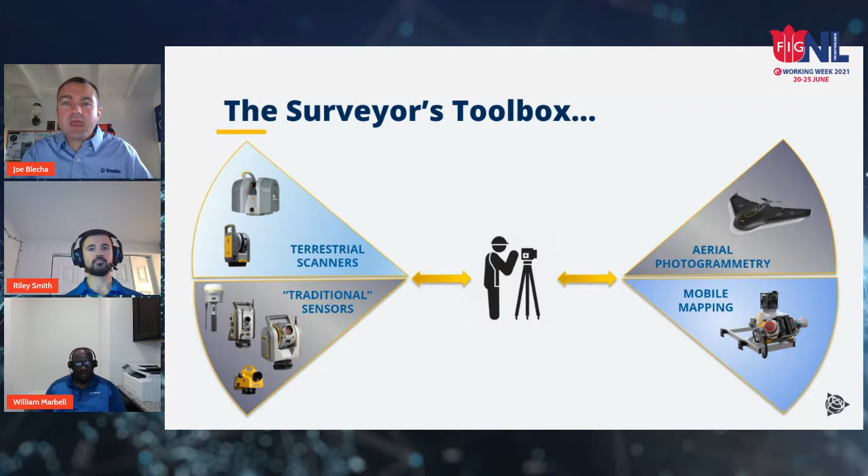But that's just the start, right? Additional sensors that are becoming increasingly common are aerial photogrammetry, either fixed wings or rotors, manned or unmanned solutions, as well as mobile mapping systems. I've got the MX9 shown there from Trimble. But then we go on, right? There's been an ever-increasing push to get the surveyor involved in the BIM conversation, right? With the 3D BIM or geospatial BIM kind of conversation, where things like metadata and attributions and a third dimension are becoming ever more important in the surveyor's world.

And speaking of attributions and features, the GIS world as well, right? Things and connections with industry leaders and partners there are, again, becoming ever increasing with the surveyor here, the data that the surveyor is collecting at the center of it.

And then we would be remiss if we didn't mention cloud services. So both cloud-based processing or data transfer or applications, things that help you, not just cloud for cloud's sake, but productivity enabling tools that are hosted or available via the web.

And then from the surveyor, from taking all of this data, moving out to a CAD environment where they can take this data, process the data, post-process the data, and then deliver whatever type of final result that is needed for the project or for the client. So this world is increasingly large and expanding. I've probably missed some things here, but the surveyor is at the center of it.

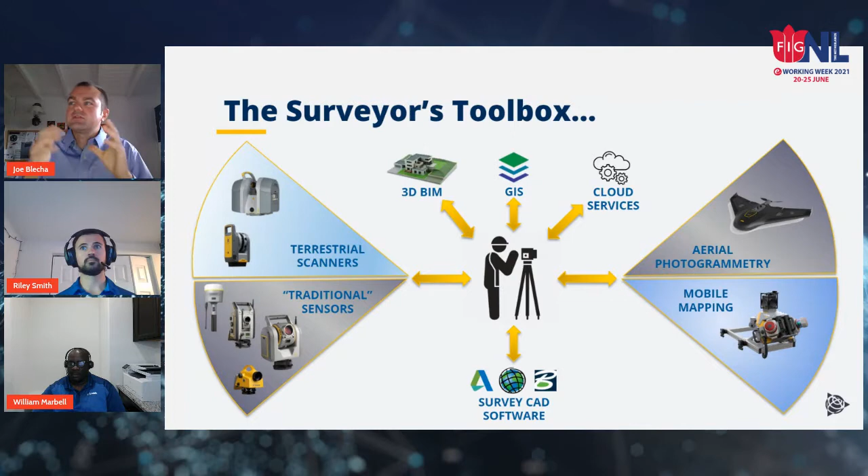And as you may have guessed, that's where we're trying to position Trimble Business Center, TBC, to handle all of this type of data, to be the one single environment to do all of these multitude of applications that surveyors are doing today. And I'll say that's a fun and entertaining challenge, and we will go into a little bit more of how we do that right now.

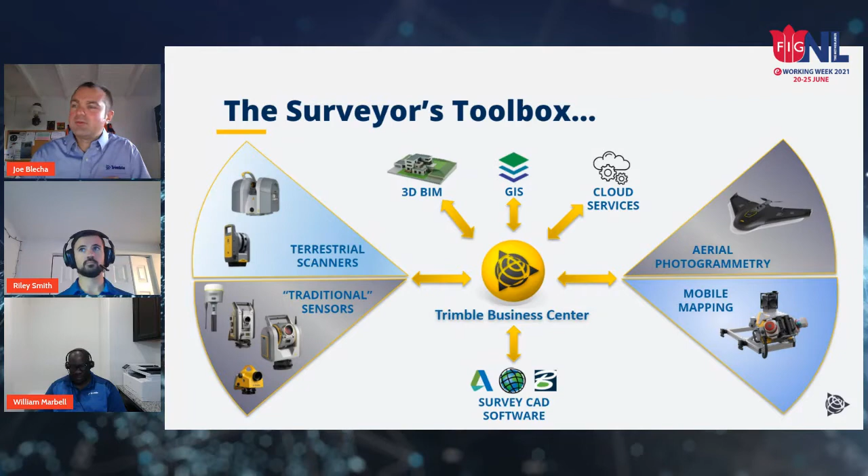All right, so our high level statement is what Trimble Business Center is. We're trying and we're striving to be the complete survey and construction office software, enabling field to finish workflows with confidence. That's a mouthful, so let's break that down a little bit further with some practical examples.

So leading field to finish workflows in Trimble Business Center start off with the field data. And that's one of the really unique pieces of Trimble Business Center: you're working with the raw data from your field sensor. So whether that's a Trimble sensor, hooray, great, we love that, or a third-party sensor, which is the reality, and there's a lot of great products on the market as well. We're trying to support the raw data.

So you're working with the observations, with the vectors, with the GNSS observations, rather than just XYZ or YXZ point files, where there's really no information behind it other than a three-dimensional coordinate.

So I love this screenshot, and there's been a couple out there that we've had where it really shows this dynamic nature of, all right, we're leveraging vectors. Those green lines are optical vectors from an optical instrument. We're leveraging point clouds. We're leveraging imagery taken from the scanner sensor itself, all in one environment, and you can interact with that data.

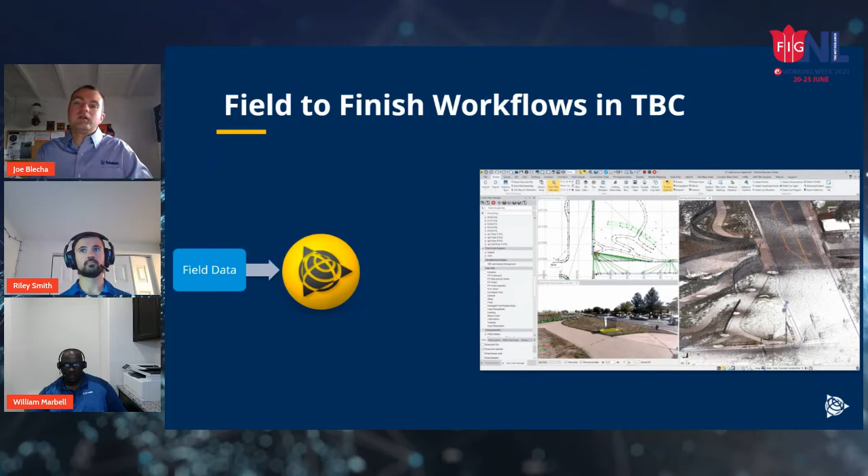And then what Trimble Business Center is probably known for the most, rightfully so, is our leading adjustment packages. That's baseline processing, network adjustment, COGO routines. So things that really will take your field data and improve it, reduce it, adjust it so you're getting the most precise and the most accurate measurements out of your field sensors as you possibly can.

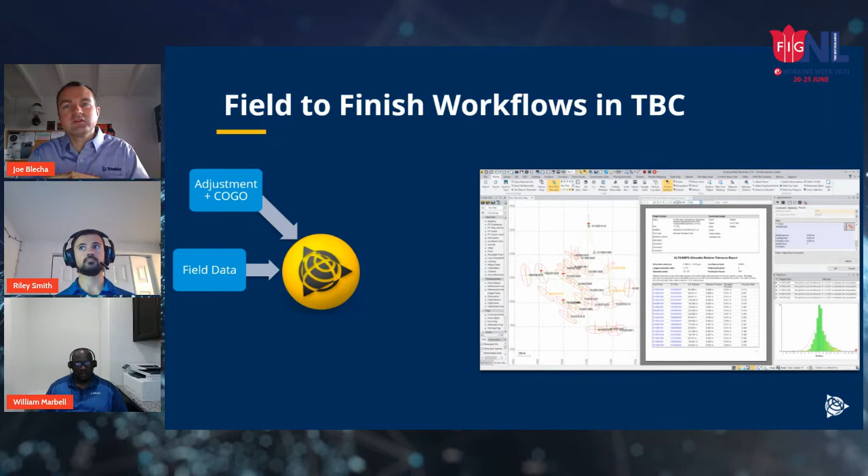And then CAD and drafting, a space that's near and dear to my heart. If you haven't been in Trimble Business Center in a while, take a new look. We've added productivity enhancing tools such as the CAD command line using industry standard shortcuts to really improve the ability to represent 2D and 3D geometry in a much more efficient way, alongside any industry standard packages as well.

Surfaces and volumes. So being able to compute a digital surface, either 2.5D or a projected surface to pick up some vertical surfaces, or a tunnel surface where it kind of folds over itself, right? A full 3D surface mesh. And then being able to compute hyper accurate volumes from that data is definitely a core functionality of Trimble Business Center.

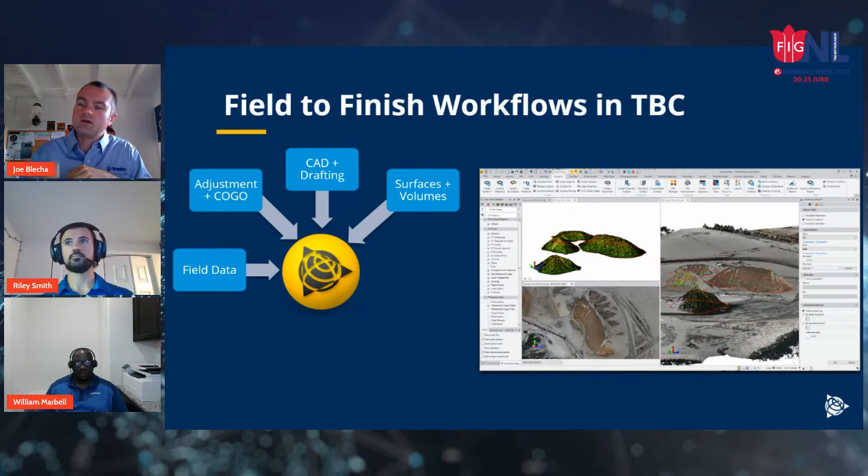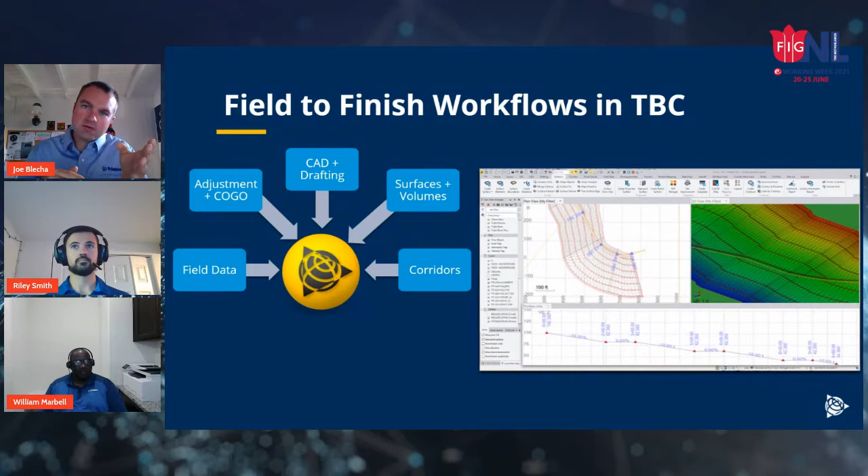And then the corridors. This isn't a design package, however, but it's a field data prep and modeling package to take a corridor design and model it. And for my money, it's the lowest barrier to entry for some very, very powerful tools and representations to model anything from a local road to a collector road to a highway or intra-country motorway. So really, really powerful parametric design-based tools in Trimble Business Center.

Data prep. So on the construction side, almost flipping the message around. So really from finish to field then, where you're taking a PDF plan set or an existing model, prepping it for a machine, for some grade control systems, for example. That's also a staple of Trimble Business Center.

And then sticking with that construction theme, quantity takeoffs and mass hauls. So anything that can be tabulated or summarized to move. All right, I've got a site plan here. How much dirt do I need to move from point A to point B to clear that site away? That's very, very much a staple in Trimble Business Center.

And then Riley and I have been doing this long enough. We probably need to expand the specialty solutions because they've gotten much more robust. But point clouds, right? We'd probably make an argument that point clouds aren't specialty anymore. Tunneling, utility modeling, aerial photogrammetry, anything, again, those kind of vertical applications that a surveyor is doing, that all exists in this one environment that can all coexist with any sort of other traditional, quote unquote, survey sensor as well.

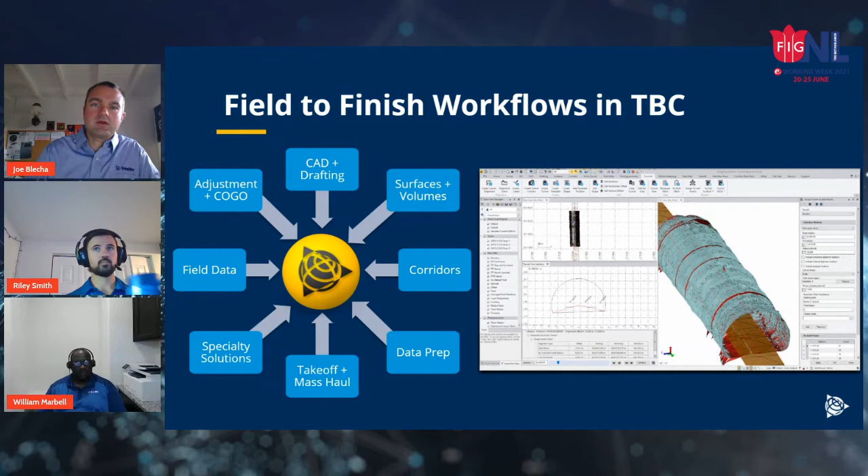So that paints the picture of TBC and what we mean about field to finish workflows in a kind of a presentation neat form. All right, so how do we do this? And some kind of unique features of Trimble Business Center. And our pillars have always been confidence, data integration, rich deliverables, and interoperability.

So confidence when your reputation is everything, right? You can stand behind your work. Data integration, talked about that a lot already, where all types of geospatial data can come in one environment. Rich deliverables, what is your client? What is the project expecting? What do you need to deliver? And then interoperability, connecting with industry standards, industry leading partners, the Autodesks, the Bentleys, the Esris of the world as well. I want to talk a little bit more about each one of those four here real quick.

So confidence, I'm not going to read. There's a lot of text on these slides, but it's important to paint this full picture. So traceability, right? There's benefits to having your field data rather than just simple exports, simple CSVs or text files of just point lists.

So we are surveyors too, as William introduced. The platform is developed and managed worldwide by a team of surveyors. We have strong presence in the United States and across Europe, as well as in Japan and Australia, New Zealand, and other places. So we really are a worldwide product and platform.

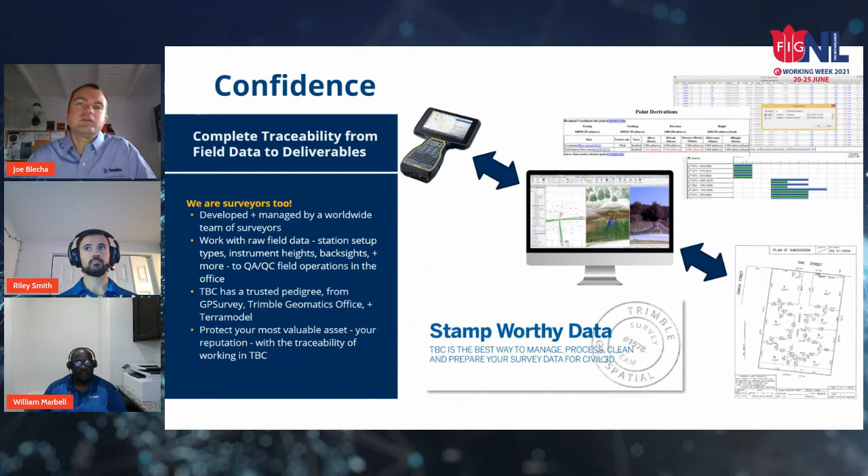Then on the data integration side, so industry-leading adjustments on the traditional, again, quote unquote, traditional sensors. Some highlights here, leading team on coordinate systems and how dynamic datums have now been emerging. I believe there's an FIG session that some colleagues are doing on the work that Trimble is doing to assure you that we're supporting the geodetic datums that are needed and that are being transformed here across the world as we add a time element, as plate tectonics come more and more into developing these datums.

Move on. And then kind of this newer frontier, right, with imagery and scanning integrated with your traditional sensors. So being able to see what the instrument sees with what we call Trimble Vision and station-based views really puts you inside of the instrument to capture all of the data or to view all the data on the project.

Some of our latest advancements is a technology we call eCogAI with feature extraction. So taking point cloud data and turning that into actionable information, whether it's point-based, line-based. We've also added cross-section extraction from point cloud in our latest release. So to be able to do more with this data and a lot more virtual surveying, right? That's becoming more and more common and useful in these environments today.

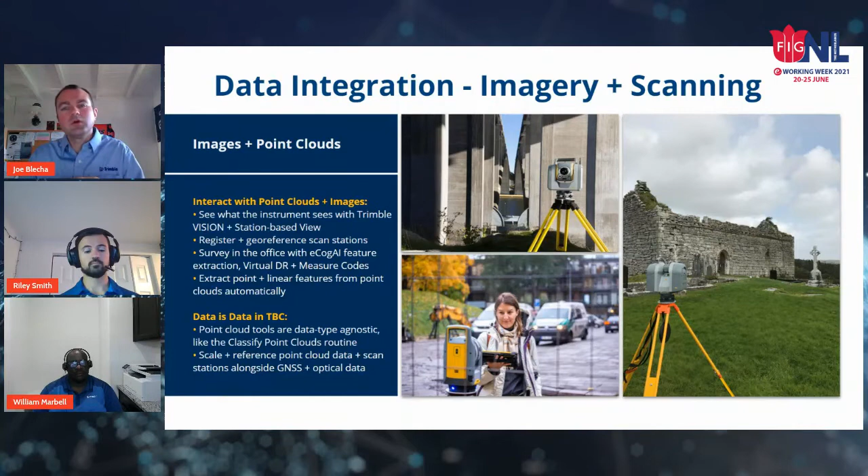And the other nice thing about the last point here is data is data in TBC. So point cloud tools are data agnostic, for example. So you can take an aerial photogrammetry point cloud and run feature extraction on it or run point cloud classification on it, just the same as you can do with a terrestrial or a mobile scanner as well.

And then speaking of some of those verticals, there are modules and features of Trimble Business Center that cover specific needs. And Riley will talk a little bit about that. But this ability to scale in one platform. So as you, or as our distribution partners, work with our customers to expand their businesses or pursue a new line of work, they don't have to learn a new software or purchase a new software because TBC can support it, and across mobile mapping or tunneling or aerial photogrammetry, you still just need to be in the one place.

All right, coming through here, rich deliverables. So this is a nice long list of everything that we've developed over the years and are included. The pieces that I want to highlight here that I haven't quite touched on is, all right, what are you going to do from TBC to connect your data out to other platforms? Seamless publishing into Trimble Clarity, which is our online geospatial data viewer for point clouds or traditional data. All that vector data and everything goes into Clarity as well.

Or augmented reality, SiteVision, right? To be able to see the site, see the construction, see the subdivision on site ahead of it being built in real time is something that TBC can connect to as well.

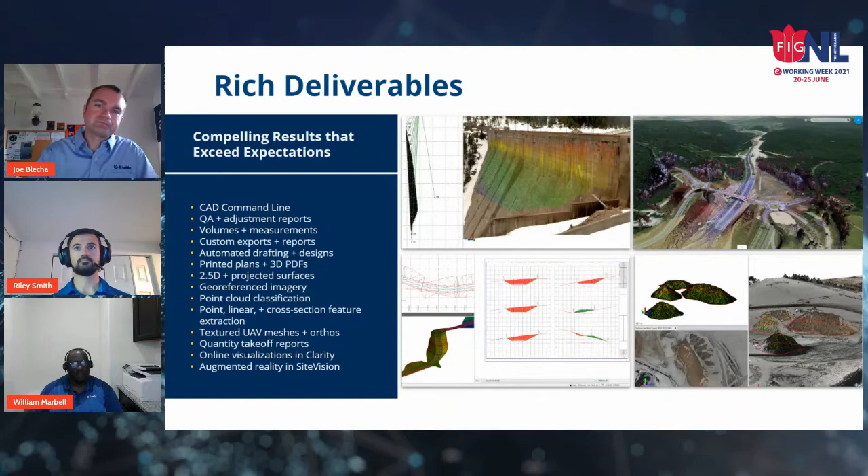And speaking of connections, again, Trimble branded or not, your data, we want you to work with your data in TBC. And if you need to connect to other platforms, again, I'll use the big three as the example: Autodesk, Esri, and Bentley. We want to enable a seamless and rich connection, reducing fidelity loss when transferring data between these different packages.

So those are our pillars, and I'm doing really, really well. If any questions have come in on that, we can take them now. Otherwise, I'll keep going. I think we're good. I think you're okay for now. Yeah. Thanks, Riley.

Okay, so this all sounds great, right? Let's actually go in and show you what we're talking about here. And one of the examples is a cadastral workflow. So, from collecting data to do something like a boundary survey or a plat survey, to creating parcels, maybe a legal description, being able to label and create a nice plan set for that is something that I'm going to showcase and talk about now. I can advance the slide. There we go. All right, so field data to finished deliverables in one software, how we do that.

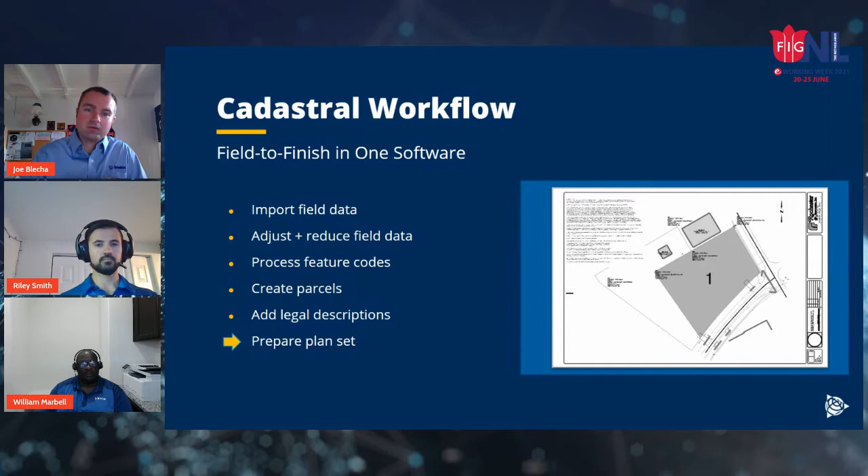So benefits here, and again, I'm gonna hammer these home because this is what we believe in and work for every day at Trimble and the Trimble Business Center team. Field to finish benefits. So working with the raw data, not just exported points. You as a user, new user or current user, I can tell you right now, there's not one person on this planet that knows everything about TBC, but there's less onboarding time if you just have to learn the one software, right? For surveyors, for construction professionals, that's what we're striving for, so that you can just learn one software, keep up with our biannual major releases and new features and enhancements that we're always working on, which will lower your costs, less training, lower costs to maintain your licenses.

And you get benefits out of this too with one software, data integrity, right? No loss of fidelity or metadata moving from package A to package B to package C, back to package A to package C again. And then flexibility, that scalability that I talked about for additional workflows. You'll see here the tunneling workflows and the things that are supported there have expanded exponentially over the last few years. And it's all in the same environment. Nothing has changed. You don't have to buy a new package to get all these nice new tunneling features that Riley will highlight here in a little bit. And then support for Trimble and third-party hardware is really important as well. We really want to be this data hub.

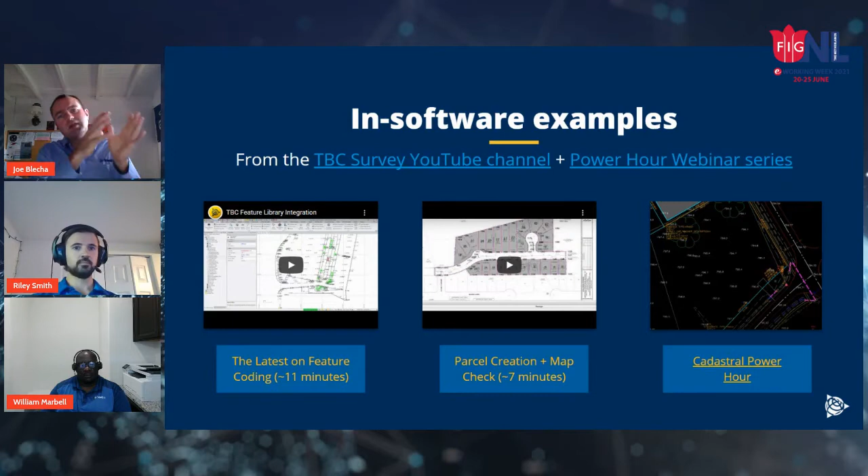I was told we don't have enough time to showcase the whole, I think it's an hour and 13-minute video. So I went scouring for some video demos, and I found this one here, parcel creation and map check. It's about 7 minutes long. I'm actually doing quite well on time, which is a rarity for me. So I can go ahead and try to play it here to really give you a feel of what that cadastral survey, boundary survey experience is like inside of TBC.

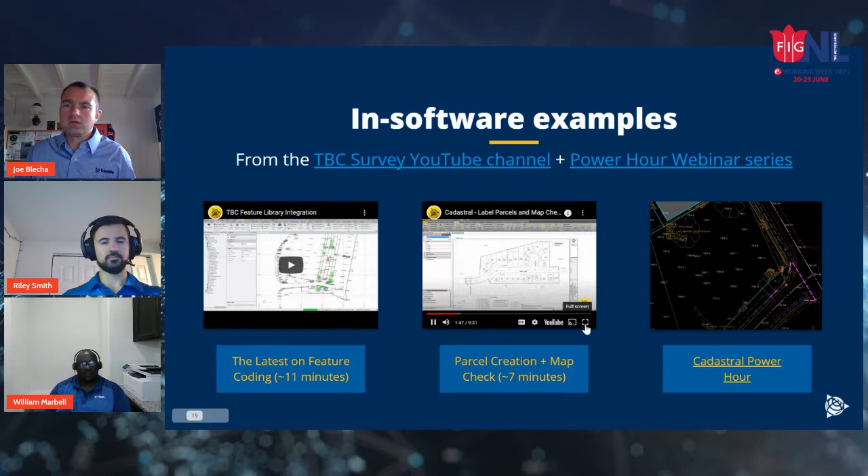So let me know if you can hear the audio once it starts. Audio is good. Great. Thank you, Riley.

These purple lines, we have the subdivision already created. This was done with the Create COGO command. There's a great YouTube video. Check out the link that should be on your screen now to see the YouTube video on how this command works. But we've added a few new things to it in TBC version 4.10, and those features are included in later versions of TBC.

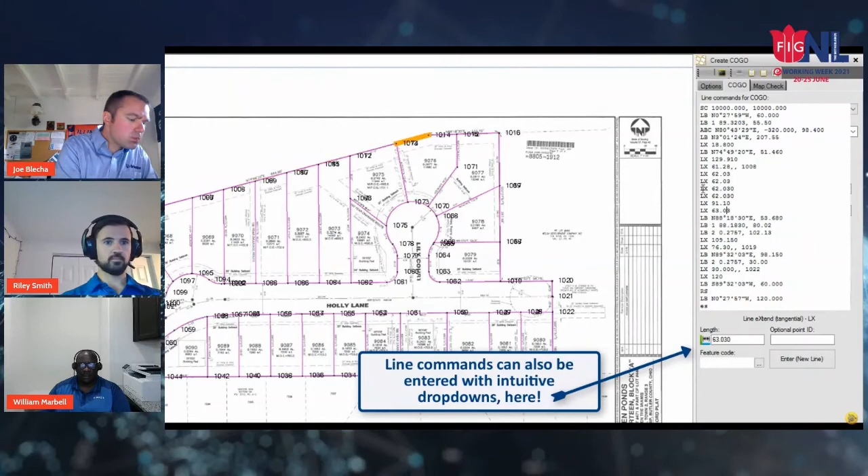Basically, it's a command line type input where you can type in with abbreviations and directions. So here we have starting coordinate 10,000, 10,000, and then we go through, and so LX is line extend, and we have the distance that each one of these lines extends. When you click in the command box here, it highlights the line segment that command is related to on your subdivision. So the idea with this is, with your hands never leaving the keyboard, you can input an entire plan very quickly and easily.

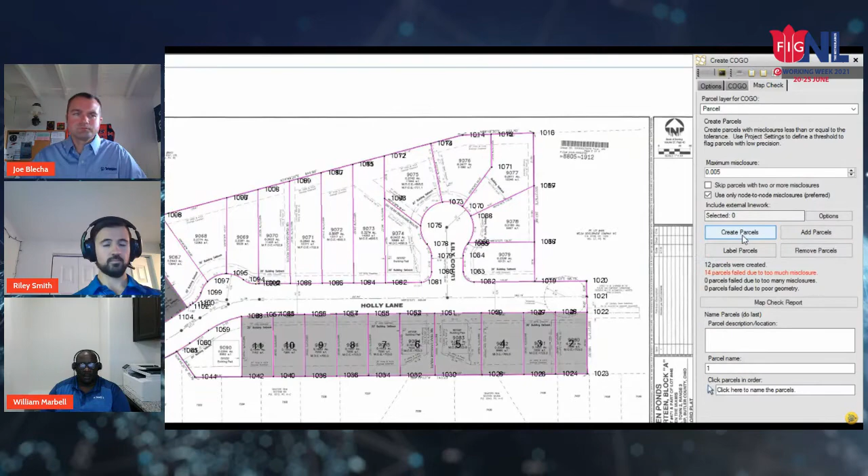So now here on the map check tab of Create COGO, we can do a few things here. The first thing I'll do is here on maximum misclosure, I'm going to make this something small, say 5 thousandths, to demonstrate what happens when we aren't meeting our maximum misclosure. If there's Create COGO line work in your project, you do not need to select it. You can just hit Create.

We have 14 parcels that failed due to too much misclosure. And the parcels that we can see are the ones that worked. So I'll put this back up to what it was, 0.328 of a foot. My project is in US survey feet. So I'll go and create the new parcels, and there we have them.

In some municipalities, you're required to have a separate parcel for the roadway. Let's say in this case we don't, so I can just click on the roadway parcel and hit remove, and it'll take the roadway parcel out. Here we have two flags. Let's check out what those are for.

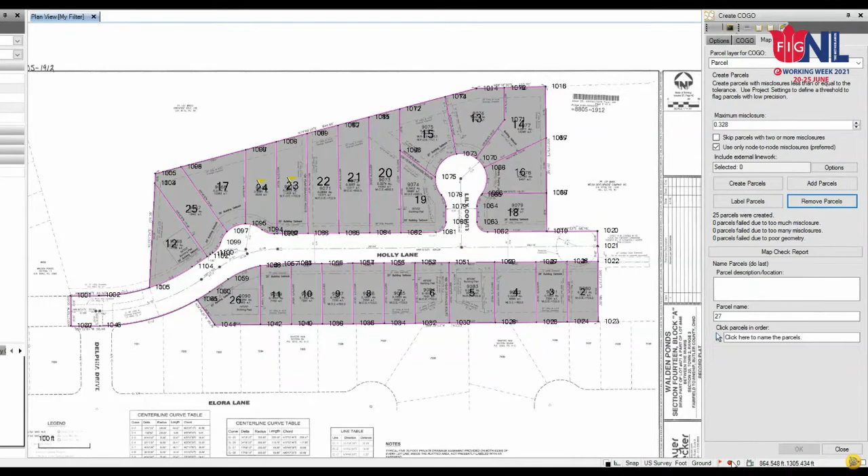Parcel 23. The precision of 12,995 is below the threshold of 15,000. For this project, that's okay. So I'm going to go and reduce my precision required. So up here in the project settings, we can do computations, COGO, minimum precision. Let's set this to 12,500.

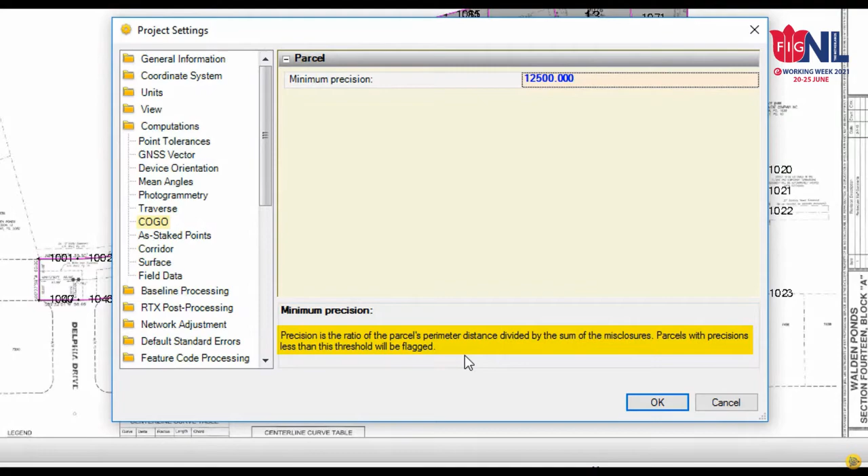Down here, we get a nice definition of what minimum precision is. Precision is the ratio of the parcel's perimeter distance divided by the sum of the misclosures. Parcels with precisions less than this threshold will be flagged. Perfect. So that's taken care of. Close our flags pane.

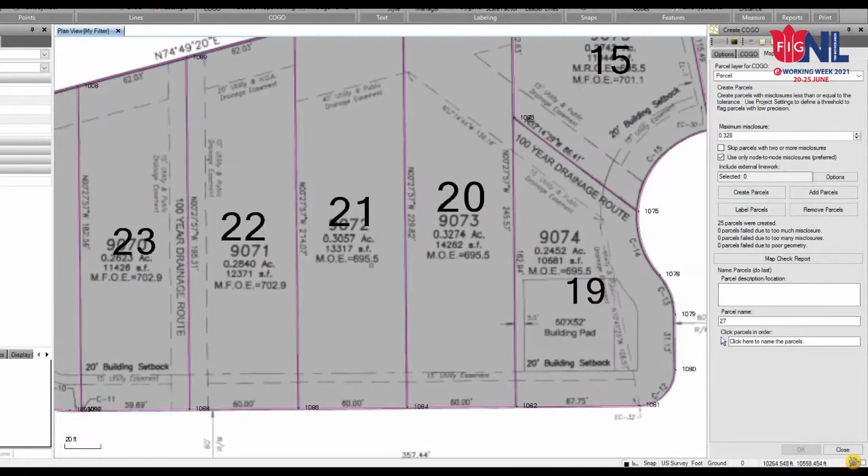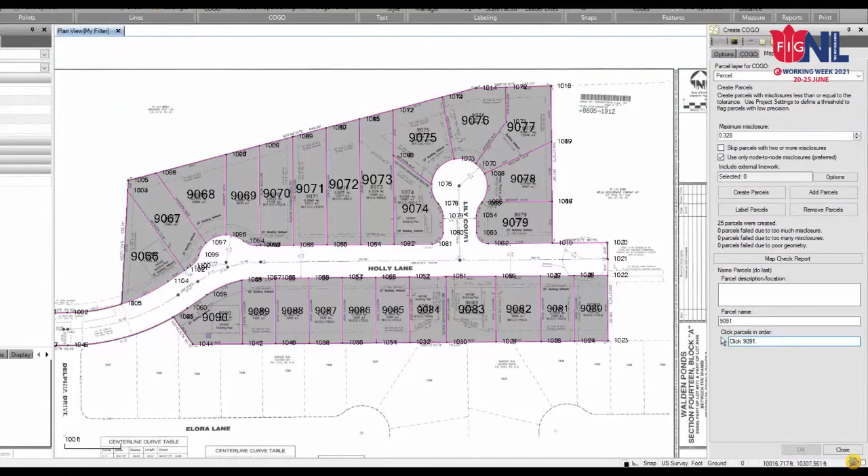If we zoom in here, we can see that the subdivision plan has this parcel labeled as 9066, and we go around increasing sequentially. So in order to easily renumber our parcels to match what we have in the plan, we come down here for parcel name, and we can do 9066, and then we can go through and renumber each of our parcels so that it lines up with what is on the subdivision plan. Consistency is a lovely thing. There we go. All of our parcels match up with what is on our subdivision plan.

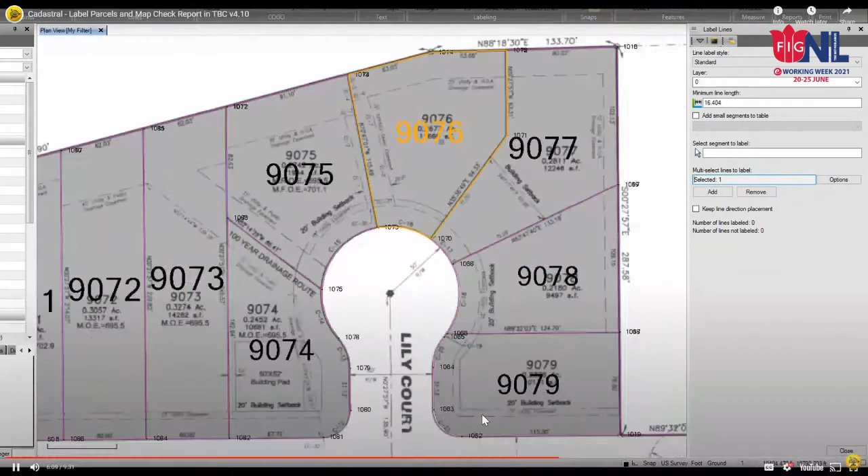All right, so now into the label parcels. When we come in here to label parcels, automatically all of our parcels are selected. I'm not going to worry about that. I'm going to hit the backspace key inside the multi-select lines to label. And I'm just going to select that one that I mentioned earlier, parcel 9076. So let's go ahead and label that parcel.

Here we have our labels pop up. We have a bearing and a distance for each of our outside segments. And we have a bearing, or a chord bearing, an arc length, and a radius of arc for our arc length.

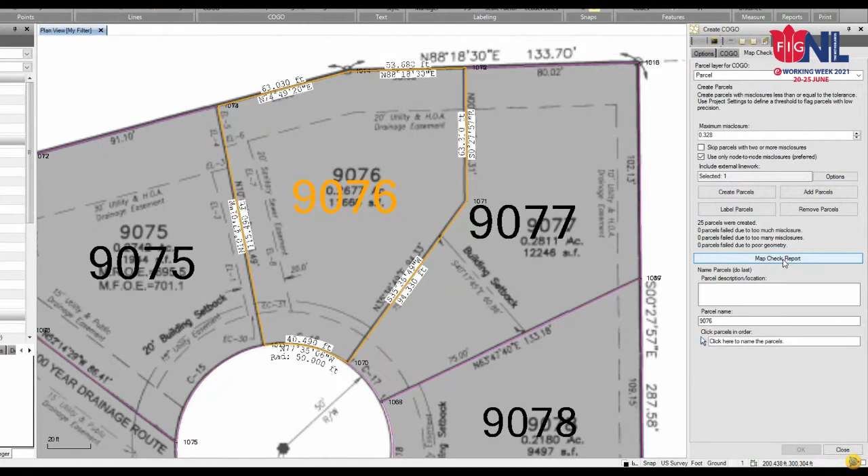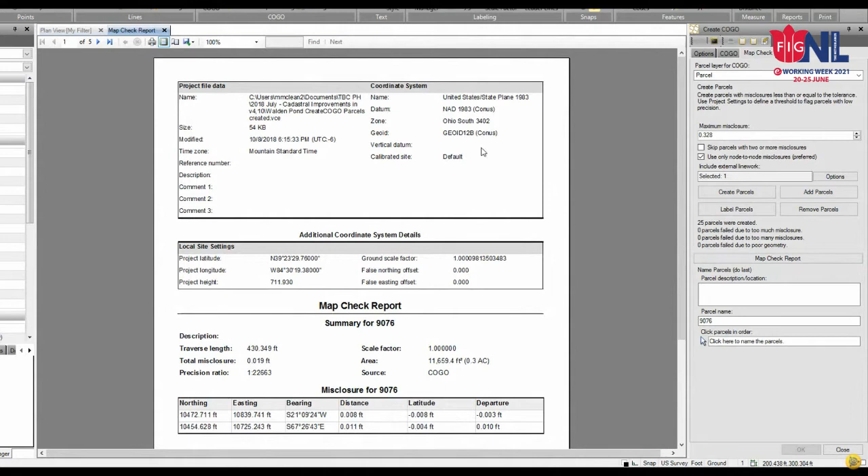So now let's close out of here, and we will pull up a map check report. The map check report calculates the misclosure for each of the parcels that you have selected when the map check report is generated. So here we have all our typical report information, our project file and our coordinate system. And then we have our project or our local site settings.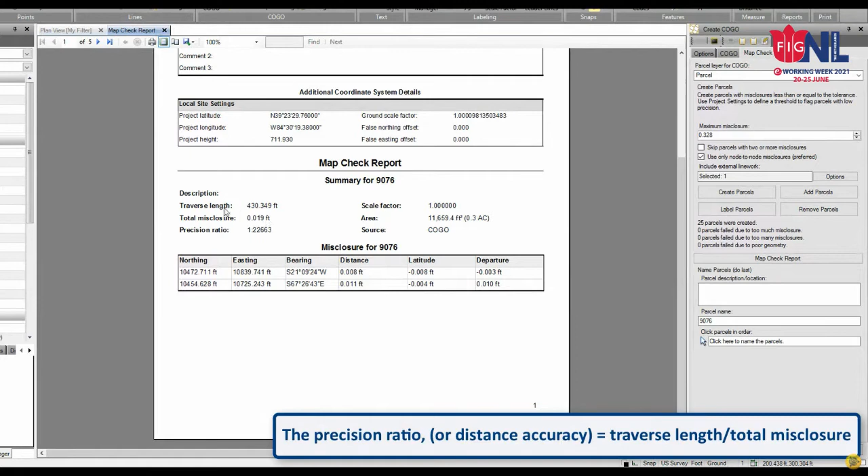And then we get our traverse length and our total misclosure, which is what is used to calculate our precision ratio. The precision ratio is the traverse length divided by the total misclosure. And we have our scale factor, the size of the parcel, where it came from. And then, for our misclosure, there are two sources of misclosure on this parcel. So we have a northing and easting for each of them.

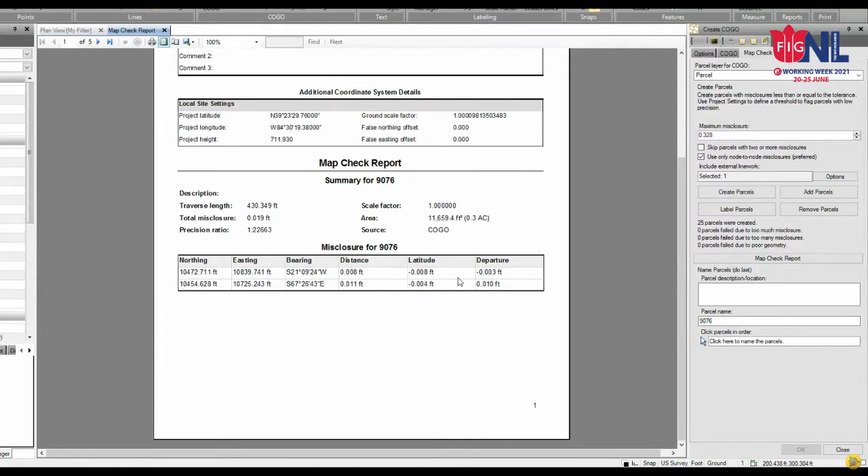The bearing from one endpoint to another endpoint for our misclosure. And then we have the magnitude of it, the distance, and then the latitude and departure of each of those misclosures. And here on our next page, we have the individual line segments that make up parcel 9076. We have an arc, a line, some misclosure, line, line, misclosure, line, line.

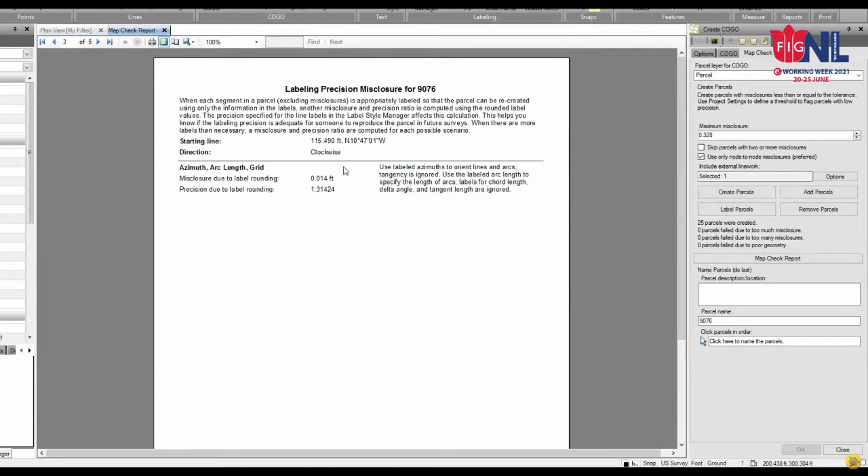We have the northing and easting of the start of each of those sections, as well as the line or chord bearing and the line or arc length, as well as the arc radius for the arcs. On our next page, we have our labeling precision misclosure. We have another video that goes over what this is. Check out the link down there in the corner to go watch that video.

And here we have a nice chart that shows our parcel 9076. We have our point numbers labeled. We have our bearings and lengths for each of the chords along the outside. And we have the information for our arc on here.

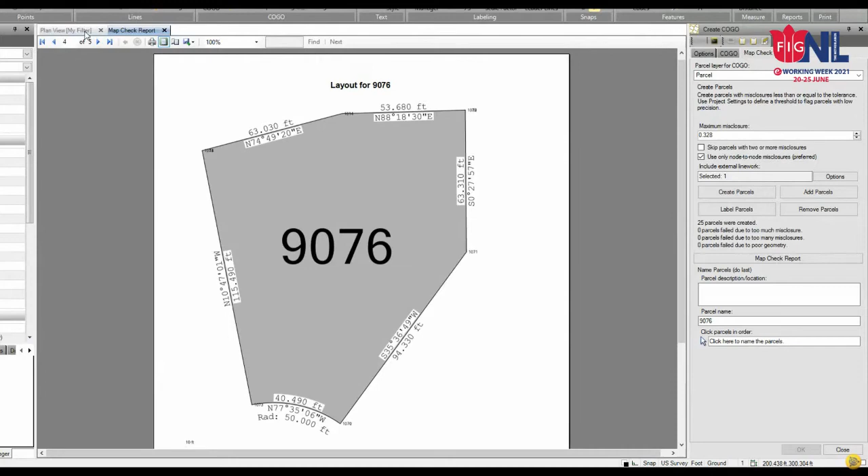Back to the plan view. So there's how easy it was to make one of our parcels. If we now remove that labeling, we can add the labeling for all of our parcels and create a similar report that goes through every single one of these parcels. All right.

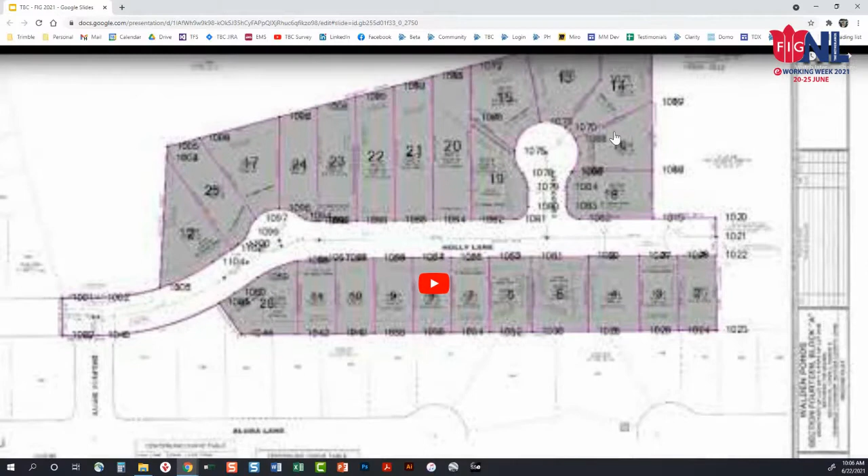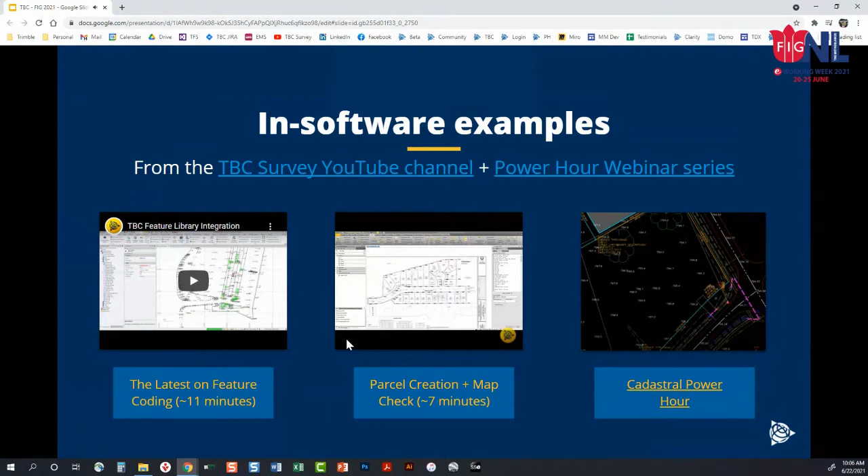Presentation. I'm pleasantly surprised that the audio worked. I want to replicate this subdivision, as I've already done. We'll pause it. Sorry. Let me turn the layer on. Oh, something's got to go wrong, of course. We have the subdivision already created. This was done with the create COGO command. Okay. Let's see if I just advance the slide.

There we go. Let me get the other one playing now too. That video showcased just a snapshot of what Trimble Business Center can do for you for the cadastral. We showed the line work and everything already created and drafted. That could be collected from the field. That could be from an existing plat of survey. That could be from really any source.

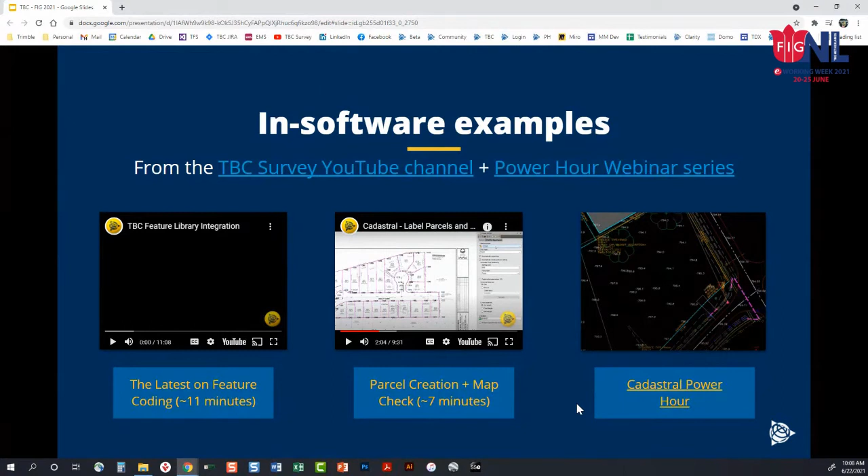So that routine really showed you how you can take existing data or collected data and then move into the parcel creation routine, boundary surveying, all within, again, one platform, Trimble Business Center. These additional resources are great. We've done a lot of nice things with feature coding and managing feature codes directly inside of Trimble Business Center. That's what the presentation on the left is, and the one on the right is the cadastral power hour that I took the example from in the previous slide.

Okay, so from here, I will pass off to Riley, and I will stop sharing, and Riley will take over the screen share. All right, thank you, Joe. Just a quick check, let me know when you can see my screen. Yes. Okay. Excellent. Thank you.

Hello, everyone. So we've got into the core of TBC, but now we're going to start to focus on what I like to call more engineering survey workflows, specifically monitoring and tunneling. So it'll be two sections. We'll start with monitoring and then get into tunneling. Here we go. So monitoring.

For those of you who are unfamiliar with monitoring, we're talking about typically movement or deformation of an object and how we measure that over time, typically to support construction, risk mitigation, and so forth, as well as safety. With Trimble Business Center we've built unique workflows that support surveying and construction professionals for those monitoring projects. It's very common that surveyors have project requirements to collect data on a repetitive basis and determine displacements and movement information to provide clients.

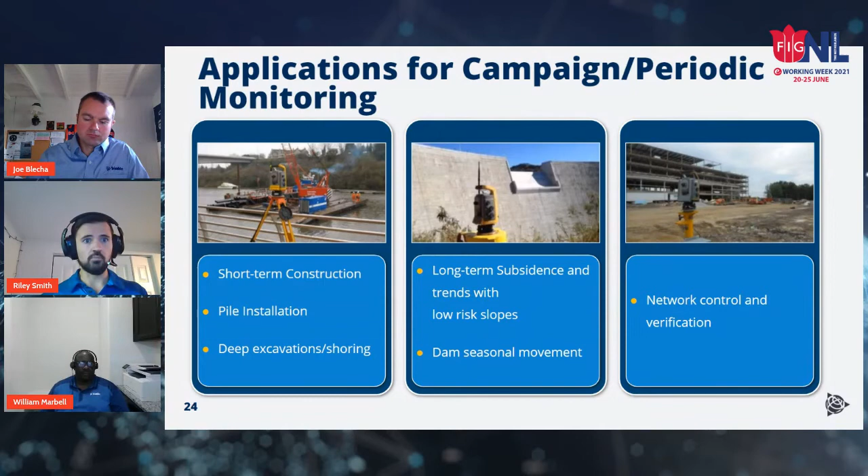Now, as we move on, we're looking more at long-term trends with typically low safety risks. Maybe you're looking at seasonal movement in a structure like a hydro dam, and you may be measuring every season, maybe quarterly. The next category is more about control and networks, where you may need to continuously update or check a geodetic or survey control network. What all of these have in common is repeated measurements to the same locations, storing and processing that data and creating reports that typically show movement or lack of movement in those objects.

So how does that workflow look, and what's the ideal workflow really? Well, you have the data collection side, whether that's with GNSS, total station, level, maybe handwritten coordinate measurements or raw measurements collected with a theodolite, and usually some field software like Trimble Access to support the data collection and remove or automate unnecessary or repetitive steps. Then there's data transfer, whether it's a manual transfer like a USB, or through a cloud platform like Trimble Sync Manager.

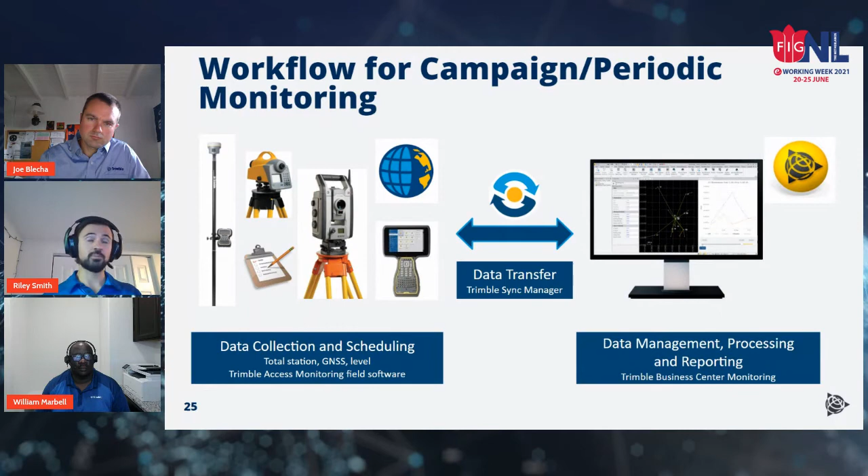And then we get into the office, where I think a lot of time today is spent on the monitoring process, where we're taking all of that field data, crunching the numbers, processing it, and trying to report on it. A lot of times this has been done in spreadsheets and even hand calculations, and it can be a lot of time for the office technician. So with Trimble Business Center, we've introduced a monitoring module that removes the manual data management and processing, but also creates those deliverables, reports, and displacement charts automatically, removing all of that time you would normally take.

So let's look a little more at TBC, and then we'll show some demos and videos of how that looks in the software. But why is TBC important for monitoring? Well, like I mentioned, we're trying to automate, not fully automate, but automate the things that really remove the pain points when we're doing these monitoring projects. My whole thing is trying to remove the need for those cumbersome spreadsheets and folders full of all the data you've collected in the field, and have it more automated.

So one way we're doing that is all of the data that you monitor in the field, you bring that into TBC, and you can visualize and quantify movement patterns. So you can actually see, are there trends on site, or do we have a shift, a rotation, or a translation in actual movement on site, or is there a distinctive trend? Then we can flag anything that has significant movement.

So as I'm bringing data in, maybe I'm measuring once a week a data set, and as I bring it into TBC, I can immediately get flags, warnings saying, okay, this point has moved out of the tolerance. Now we need to dive in and figure out what we need to do to assess that.

And then, of course, what a lot of the time we're looking for is the deliverable piece, where we're trying to generate some type of chart or displacement report to, one, quantify those movements, and two, have a report that shows all of that over time, and it's typically a requirement on a lot of these projects for the stakeholders. So all of these things can now be done in TBC.

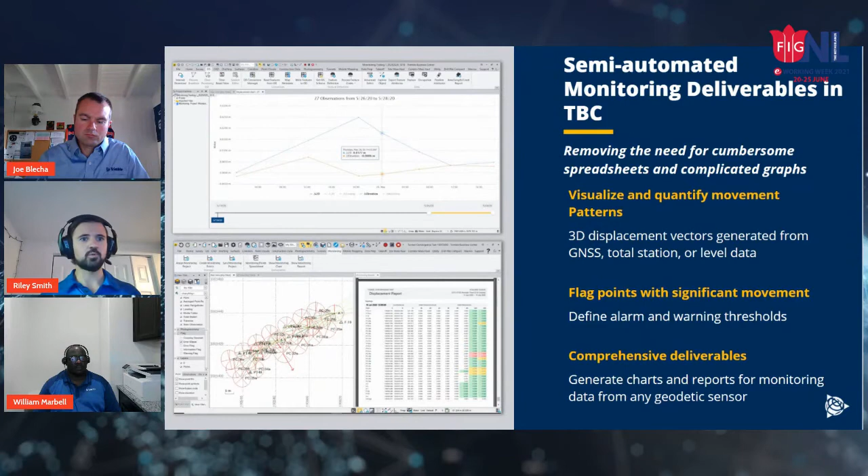And what's really important there is TBC has already been, as Joe was talking about, the database, the core for all of that geospatial data. Now we're just taking that data and creating monitoring deliverables from it, which in a lot of cases people were already doing. Surveyors are already doing these things, but we're trying to remove the pain points and make it a lot easier to create those things. So let's show some videos here on how that looks. So this is more the field side of things, these first two videos.

All right, I think I'm back. Lost audio for a second. Thanks, Joe. You didn't miss too much if you're watching on screen.

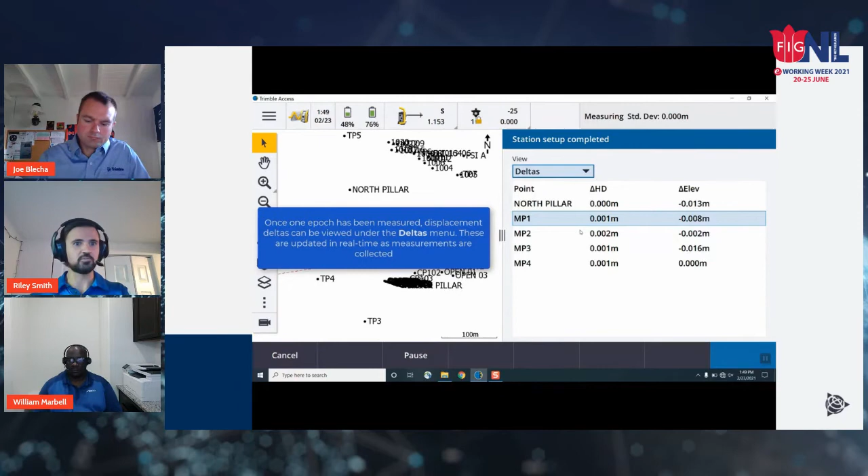Yeah, so what we're seeing here is the field software. Essentially, I'll play this again. What we're seeing in the field, how to somewhat automate that collection, is a lot of the time we're performing repetitive measurements. Maybe we're performing multiple sets, multiple rounds on targets. And we don't want to manually do that because it's a lot of time for the operator, and it's prone to making mistakes, whether it's a pointing mistake or something else. And so we can automate that function in the field software.

And while we're collecting that data, we can get real-time information on the displacements and see if there's any significant movement. Now, just to visualize how that looks, here's a video, and I'll speed it up for time's sake. So there's no operator, nobody's doing anything. Once I've said, okay, I want to monitor these targets, the instrument collects the data without any further input.

So we're removing that need to actually stand at the instrument, constantly turning those angles to every different target. So this is very important where I may be collecting 50 or 100 targets from one setup. This is saving a ton of time while I'm in the field to collect that data. Now, once we've collected all that data, obviously we need some mechanism for visualizing the displacements and so forth.

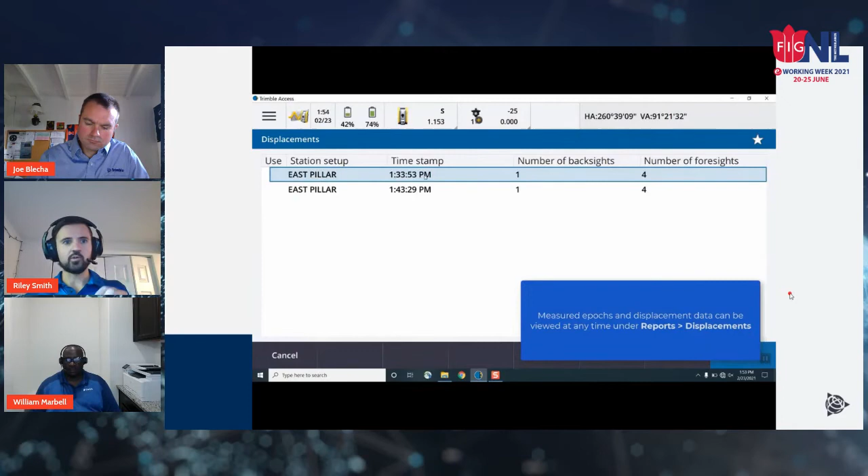So while in the field on the data collector, we can go in and query down into each individual set, each individual round of measurement, and see what was the displacement. So in this case, I'm not seeing a significant amount of displacement, maybe a few millimeters here and there on each target, but I can drill down into that and see any trends while I'm in the field before I even leave and go back to the office.

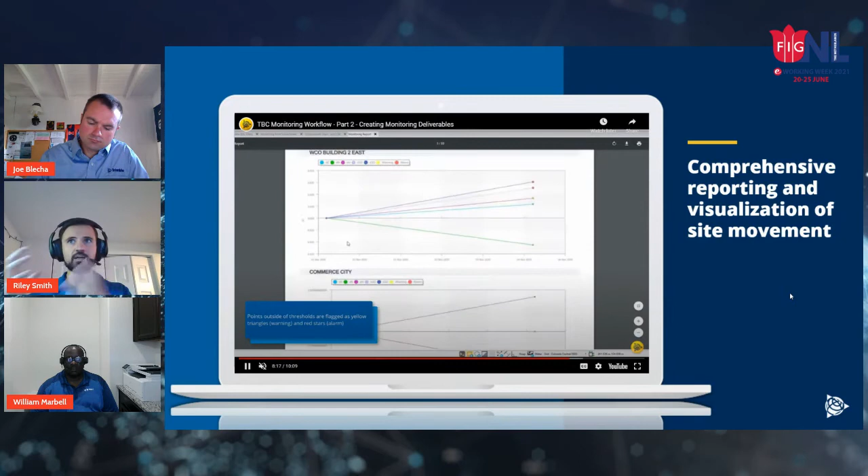Now, where TBC comes in and is really the key part here is creating the deliverables. So we can take all of that data, we can create our displacement reports, we can visualize any of the alarms that may have been tripped. So if I've exceeded my movement thresholds and I need to verify, okay, that these points were out of the threshold and they're moving a certain direction. Maybe they're settling. Maybe there's some movement downward.

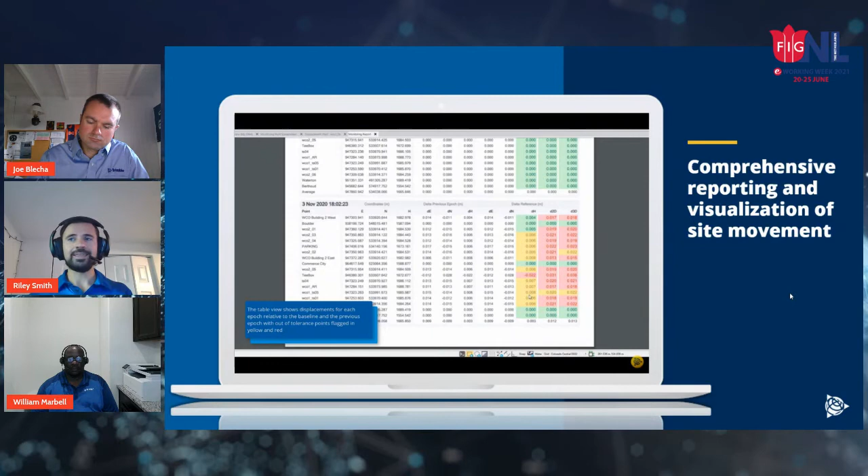I can see all that from a variety of different views, whether it's a table view, charts, reports, scatter plots, really a comprehensive view of movement on site. And then I can take that data, and in TBC, I can also visualize the movement patterns. So for instance, I have a set of points on a building, as you can see here, and I want to know, okay, how is that building or buildings moving?

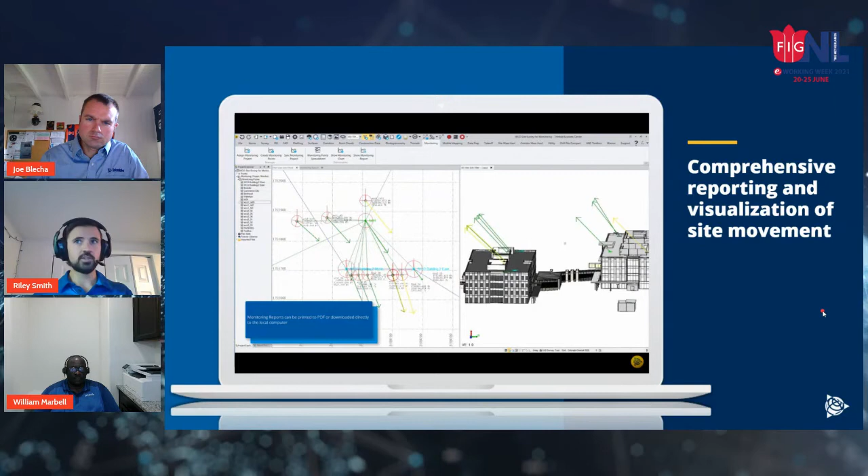All right, so we've talked a lot about monitoring. Now I'd like to take the next set of time to get into tunneling, another passion of mine, and I would also say underground mining as well. They have a lot of similarities for surveying. So essentially taking those core survey techniques and technology and applying it into an underground environment where we're GNSS denied. We typically only use optical instruments.

And so the history of Trimble there is we're taking the geospatial sensors and technology that you all know Trimble for, but we're applying it with unique workflows to the underground environment for underground survey and construction professionals. So they obviously have some different workflows, different reporting and deliverable needs than you might need on a different type of construction, like for building or earthworks construction. And so we've built unique workflows in both the field and the office software to support that. So we're going to get into more, especially on the TBC side, how that looks.

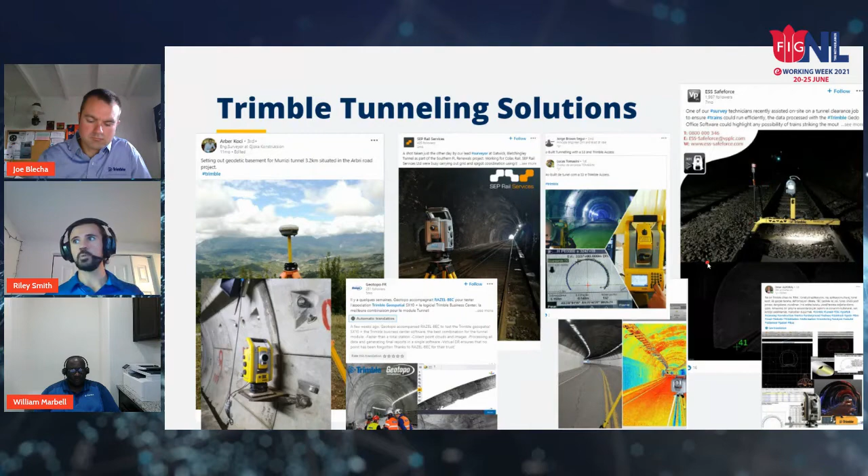So a little more information. Trimble's been used for tunneling in a variety of ways all across the world. Everything from what I would call the project conceptual design phase, where we're gathering the initial control data and topographic information to help assist the design engineers, all the way to inspection and construction, as well as rail and tunnel clearance inspection for tunnels. And how we do that is we look at it more from a life cycle for the tunnel. So it's not just we build a tunnel and it's done.

There's all sorts of aspects within that project where surveyors and construction professionals need geospatial data collection and processing, from the very start all the way through to construction, even helping guide the machinery with positioning sensors, to monitoring, to reporting, and then finally, once the tunnel's built, how do we collect the necessary geospatial data to support inspection and maintenance processes? When do we need to collect assets, and how do we collect those assets within the tunnel infrastructure, leveraging things like scanning and optical technology?

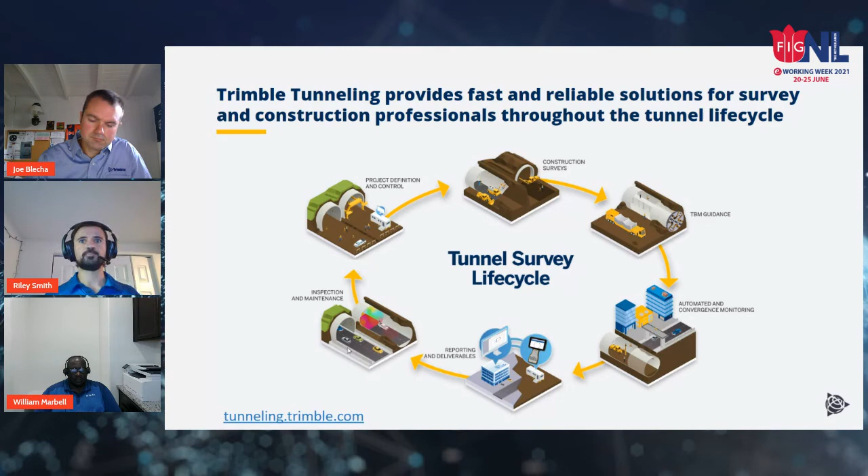So what are we doing with TBC here? Joe alluded to it, but let's dive a little bit more into it. So we have a great module within TBC called the tunneling module. And I'm going to leverage that whole field to finish concept, but apply it to tunnel survey and construction. And this is, I would almost call it a field to office to finish kind of workflow, where it's a very iterative process. It's not collect data, go to the office, process and done. It's very back and forth, because the construction process is not a one and done. It's a continuous process throughout the tunnel until it's built.

And so it's really important that how we prep the data and prepare it for the field crews is as automated as possible. We can bring in design information from other packages, but also take all of the existing tools in TBC and create the tunnel design information and prepare it so we can use that when we go out in the field to do the stakeout, do the as-built collection, and so forth. And not only the ability to do that, but make it as fast and as automated as possible so that you can get in, get it done, and get it out to the field crews so they can start doing the construction work, which is really the important part of this.

Now, in terms of actual survey data collection, this is all about productivity. Tunnel construction projects are very fast paced, and any delay in that operation can be very costly, but it also can be a very safety conscious process, especially when we look at drill and blast and traditional tunnels where we need that survey data to support things like the foundation, the shotcrete, and the drilling and blasting. And so being as productive as possible by automating the office processing of that data is what we're trying to do in TBC, and I'll show that in some videos here soon. And then reporting.

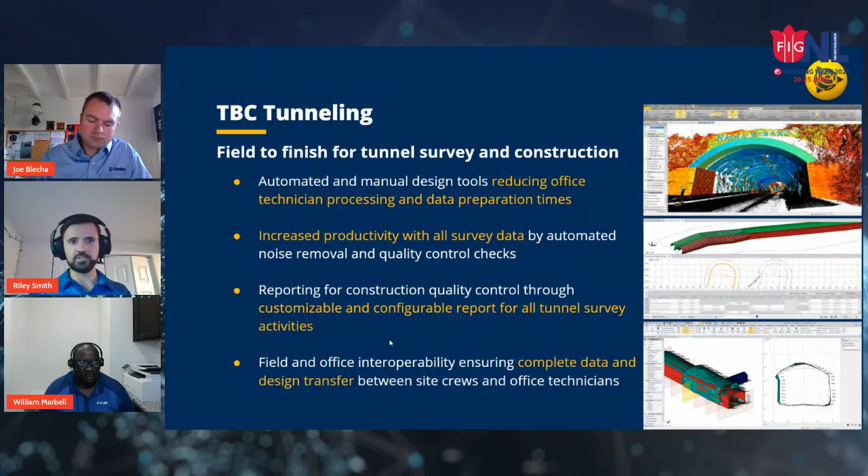And then, of course, being one system, we want everything to transfer seamlessly between the office and the field. So whether I'm scanning or I'm using a total station or a level in the field, I want all that information to come into TBC, and vice versa. If I'm creating any of that design information in TBC, I want it to go back to the field so the crews can benefit from it.

So in thinking about that, we'll kind of go through with little videos to support how this looks in TBC and how you can do this tunnel workflow, starting from more of the design phase, and then we'll get into construction and reporting and what you can all do in TBC.

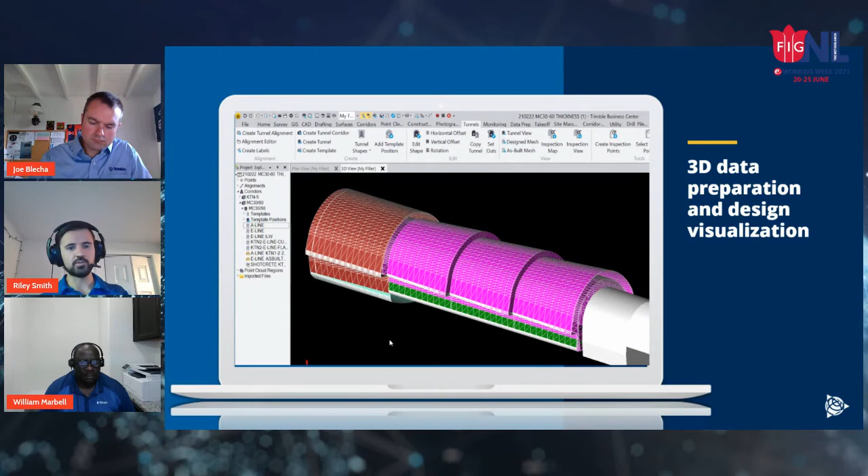So starting with more of the design, you can have as simple of a tunnel or as complex of a tunnel as you want in TBC. Here's a good example of a fairly complex one, but there's no limit on your geometry. It's a matter of your project requirements. All the tools are there for you, and you can create those tunnels in TBC, whether it's from an imported CAD design, maybe you have an existing one, or maybe you're keying in that information from a plan or a blueprint.

And what I think is really powerful is there's multiple ways to visualize and check that design information. So one can be a cross section, but also, as you can see in the top side of this video, it can be viewed in three dimensions as well, so we can see it as a whole design as opposed to just singularly in a 2D view.

Sorry, everyone. I'm not sure, my audio keeps cutting out. Apologize.

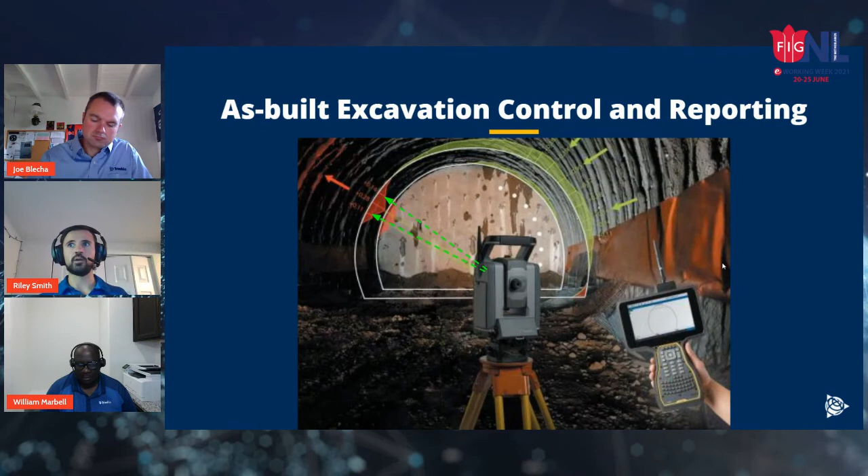All right. So the as-built and excavation reporting. So a big activity is reporting on the construction activities and ensuring that the proper amount of excavation has been performed, and there's no what we call underbreak or undercut, so that it's meeting the design requirements. And so a big task here is being able to take that as-built data and create the necessary reports to visualize that information and quantify it as well.

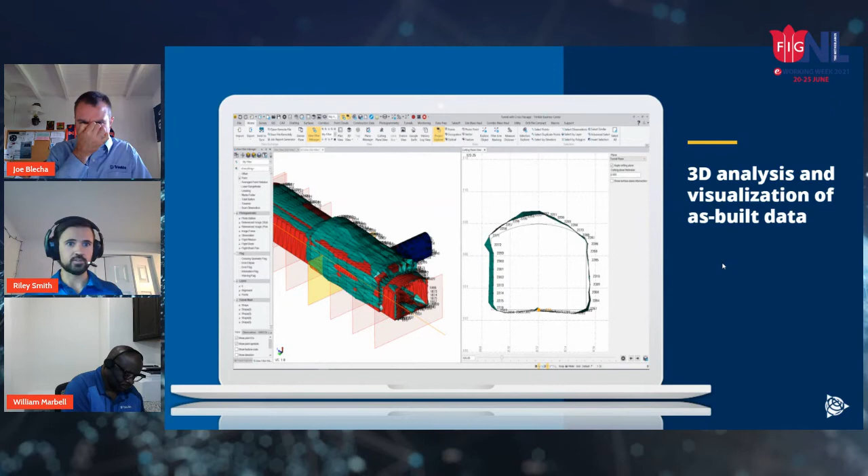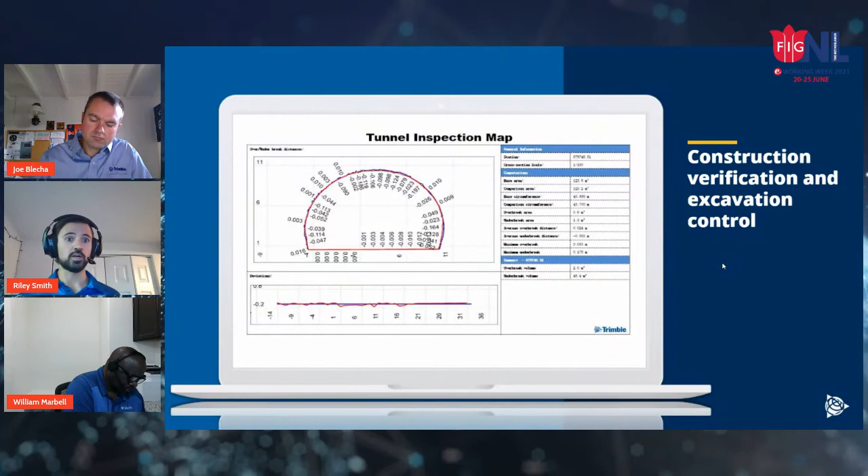We want to know the volumes, we want to know all the areas and so forth, and we want to know that relative to the tunnel. So as we can see here, we can see the context of the design relative to all of that as-built data that's been collected, and it gives us more visual interpretation of the construction activities. And then from there, we can generate all of those as-built reports that show everything from volumes to cross-section views to specific points that the construction crews need to do more work on, for instance, when there's undercut areas.

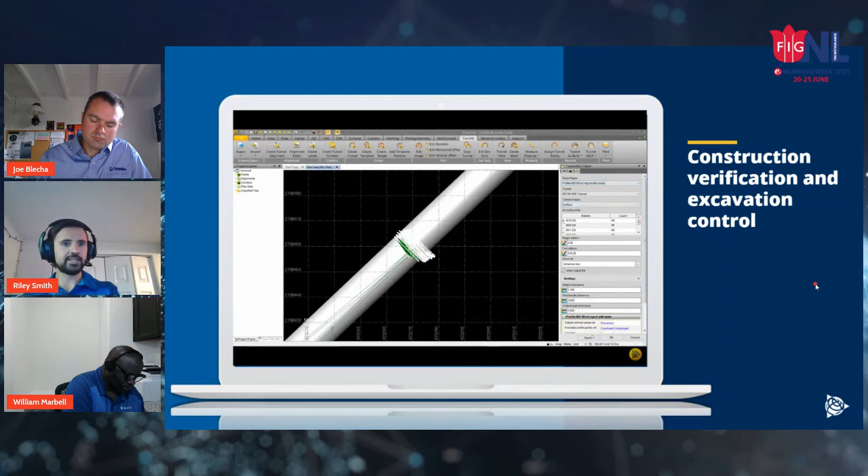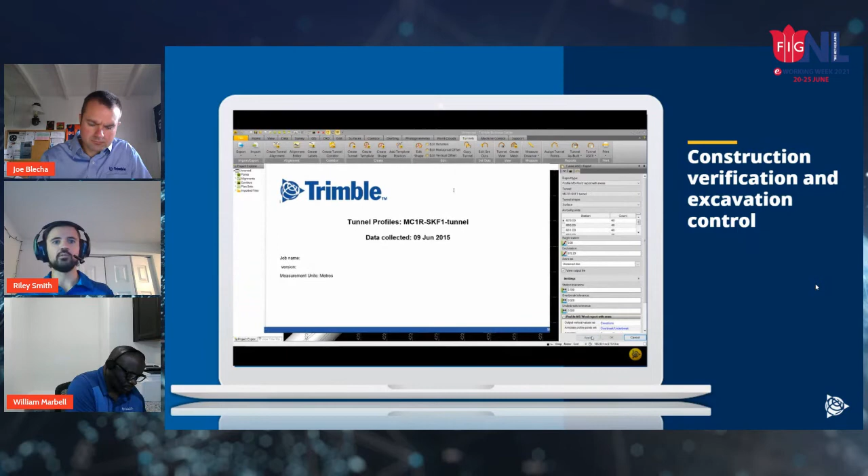Here, I'll show a little video that shows this. So here we have a 3D design, and we've gone out and we've collected some as-built data in the tunnel, and we want to generate a report. And it's as simple as a few button clicks, and boom, you've got a nice report in Microsoft Word that gives you all of that information. Whether you need that to support the construction crews or it's a deliverable to the client, you can provide that to them.

And one of the big new technologies that's been used more and more in tunneling over the past 5-10 years is 3D laser scanning, where you're bringing massive amounts of data in, and creating these reports from it.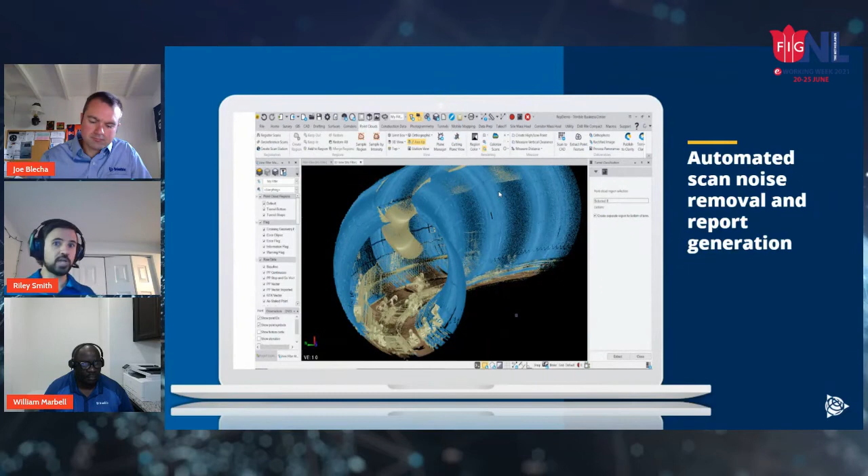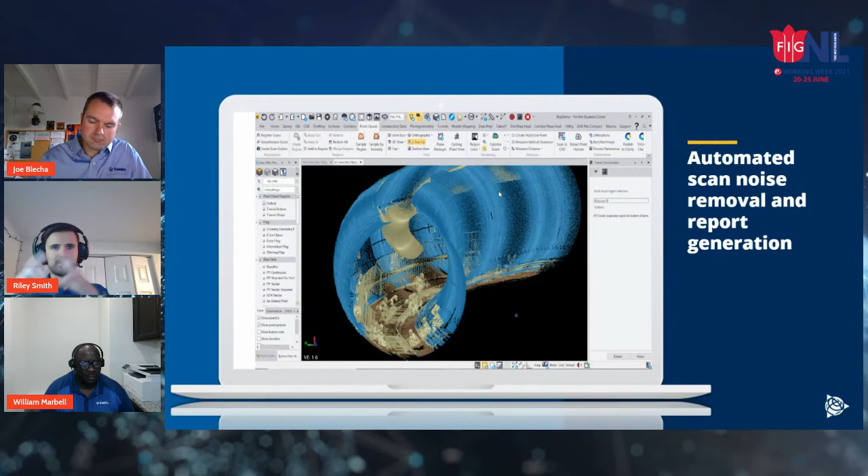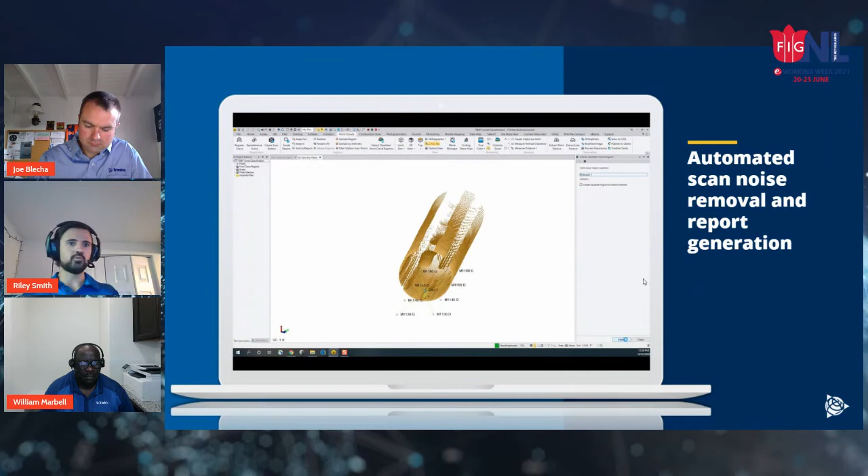Now, one of the challenges with that is because you have so much data, you get a lot of noise. You get things like the ductwork, people, machinery, rail, whatever it might be, things that are not the tunnel structure, which is what you're really looking for to check. So we've built tools in TBC, since it's such a big pain point, to automatically remove as much of that noise or parasitic data, if you will, from the cloud.

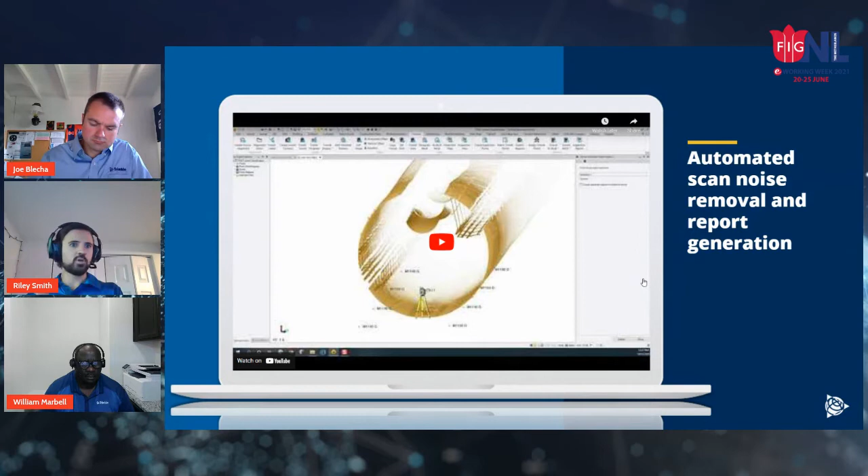So you can see here, we just ripped out all of that data. Everything in blue is the tunnel surface, if you will, and then everything else is what we consider noise. So what that's doing is it's reducing that whole chunk of time that traditionally somebody would have spent manually removing all of that noise and then creating a report. It's click a button and then generate your report. So vastly saving time. And then you can get that end report. So for a TBM, it's especially important to get those ring as-built reports and those best fit centerline.

Now, shifting gears back to more traditional construction, maybe we're applying shotcrete and we need to check layer thickness. Very important to do, and we can do this both in the field for quick analysis with Trimble Access, so we can see hot spots while we're in the field and direct the shotcrete crew, using the scanning technology of the scanning total stations like the SX12.

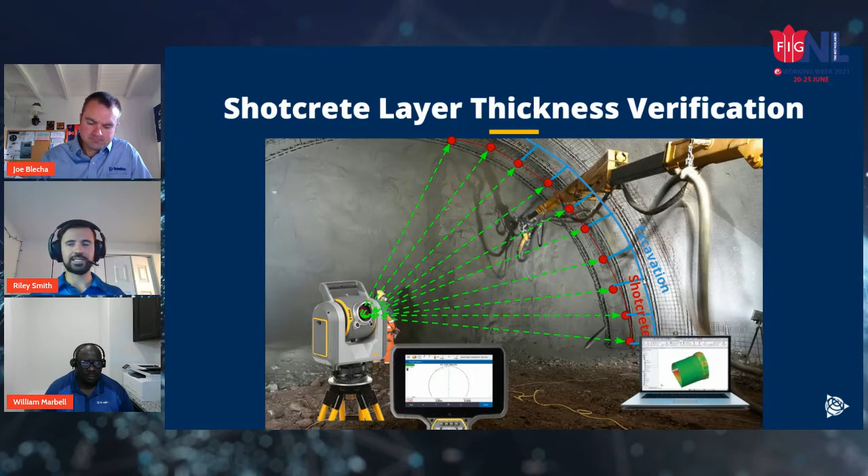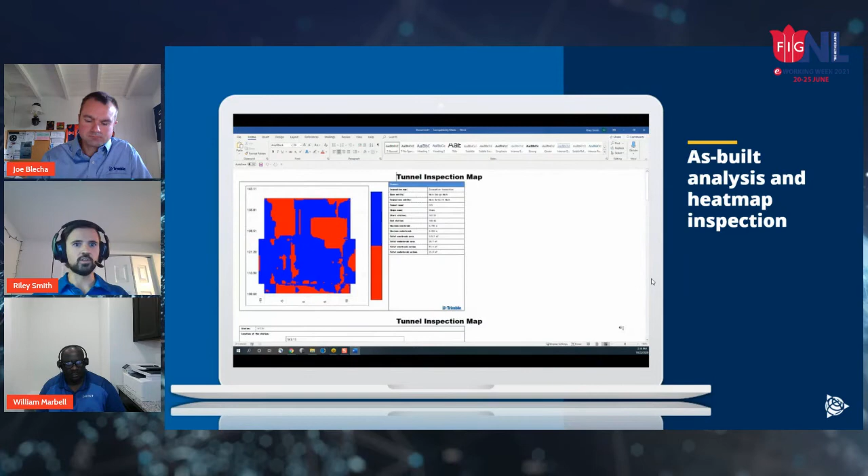But then we can bring it into TBC and create more comprehensive analyses like inspection heat maps and visualize those in multiple ways, whether we're looking for thickness or smoothness or just general volume and area quantities for the amount of shotcrete that was applied. And we can create those in various types of reports.

All right, and now one of the other very important tasks in all tunnel projects, both from a construction perspective, but also tunnels that exist, and maybe there's some ongoing construction or rehabilitation on that tunnel, is performing monitoring. We were already just talking about monitoring a minute ago, but why is this important to tunneling? Well, there are slightly different requirements here. Traditionally, when we're monitoring, we're looking at coordinate positions and the changes in those coordinates, or maybe the change in a distance or angle as the total station measures.

But with tunnels, we're really looking at movement relative to the tunnel axes, right? We're talking about station, so forward and backward along the tunnel. We're talking offset left, right, and up and down relative to that axis. And this is important because all tunnels are designed with some factor that they will, as it sounds, converge in on themselves once they've been built, from all the strains in the structure or the ground around it.

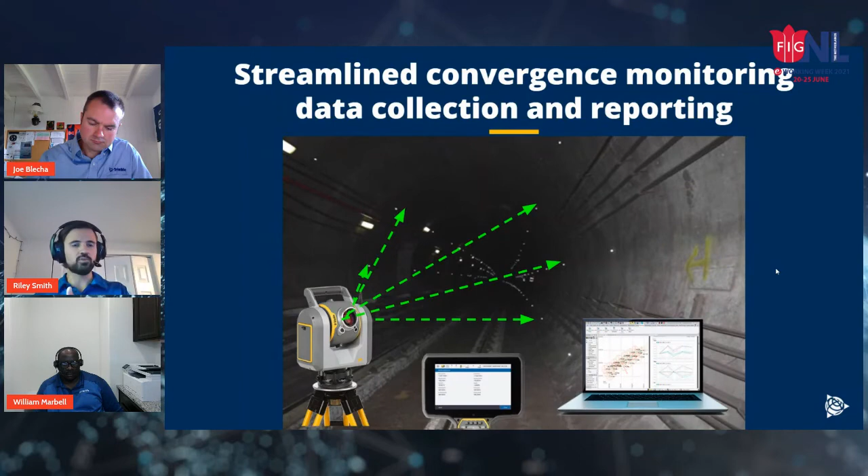So it's very, very important for the survey team to collect all this data over time as the construction is progressing, to ensure that the tunnel is converging to standards and not too much, because then obviously we have some safety concerns. And so not only are they collecting that data, but they have to process it and create all of these reports. And these data sets can be quite large because they may be collecting once, twice, three times a day the same points, and doing that over many months or even years.

So we can take all of that and additionally create more what I would call specific monitoring reports. We talked more about the general runs before, but now we're getting more into specific workflows like for tunneling and underground monitoring that are relative to the tunnel axes. And we can see those movements in context and as well create all of those configurable reports.

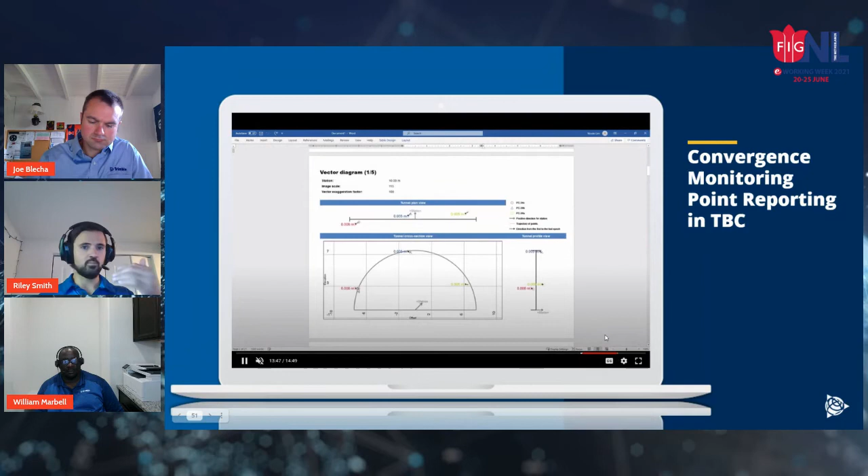I'll just skip ahead here so you can see it. See all that movement in context of different axes of the tunnel, whether it's a plan view, profile view, or a cross-section view, and then quantify that over time. Okay, did we have significant movement at a point or not?

Excellent. Now, as we get closer to the end of the construction of a tunnel, one of the main workflows for the survey team is to as-built the final position of the tunnel. And a lot of the time, this is done with 3D laser scanning. One, because it's a more cost-effective means. It's faster to collect that large set of data, so we can go through the tunnel and perform a few scans to get a lot of cross sections, where before we'd have to go in with a total station and manually measure each ring or each cross section of data.

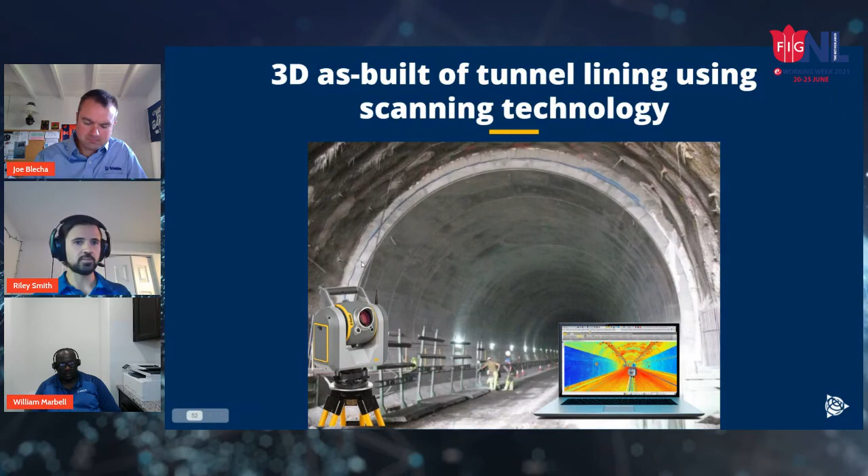So now we can get a very high density, high resolution of that tunnel surface, and we can bring all that data into TBC and create those reports from it. But one of the important parts of this is also sharing this data in a meaningful way with all of the stakeholders on site, whether it's the geotechnical crew who is doing analysis on the next section of tunnel that's to be constructed, and they're looking at the rock formations. Maybe they want to see the imagery or the scanning data that was collected, or maybe it's the owner operator who wants to see the current progress, and being able to share that data with what I would call a non-geospatial professional is very important.

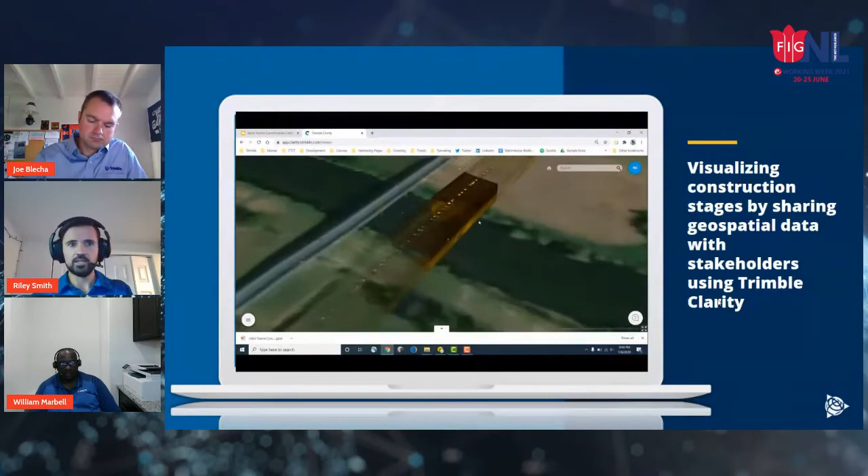And so this is where I think Trimble Clarity, which Joe mentioned before, is very, very useful, where we can take massive amounts of 3D laser scanning data and share it with any of these professionals in a simple web browser. So I can just get a link, open it up, and here's a good example of a tunnel project. I believe this is in the Netherlands, where we have a massive data set, and I'll play the video again, a massive data set of that tunnel infrastructure, showing all of the assets, showing all of the information there.

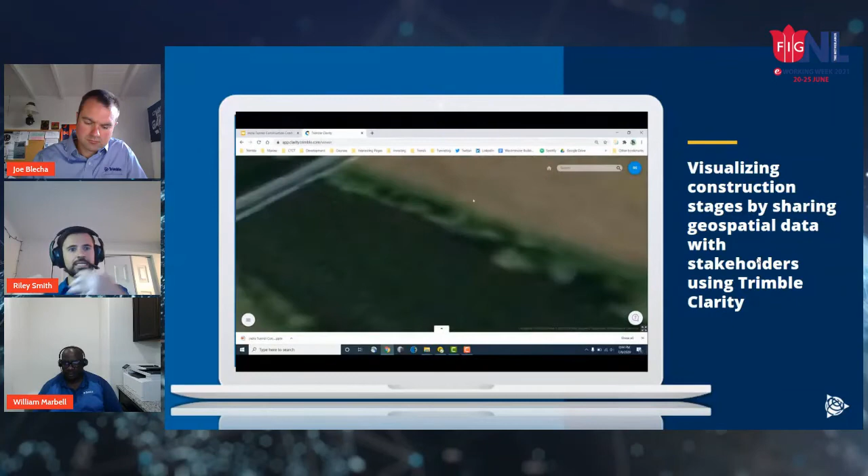And then the stakeholders don't necessarily need a software like TBC, because we know that not all stakeholders on site are survey or construction professionals. They might be engineers, they might be operators. They just want to see the data in context and help them make decisions. And I think that Trimble Clarity is a very useful tool. So all that data in TBC, once it's processed and ready, you can send it to Clarity and basically give somebody a URL, and they can view it in context.

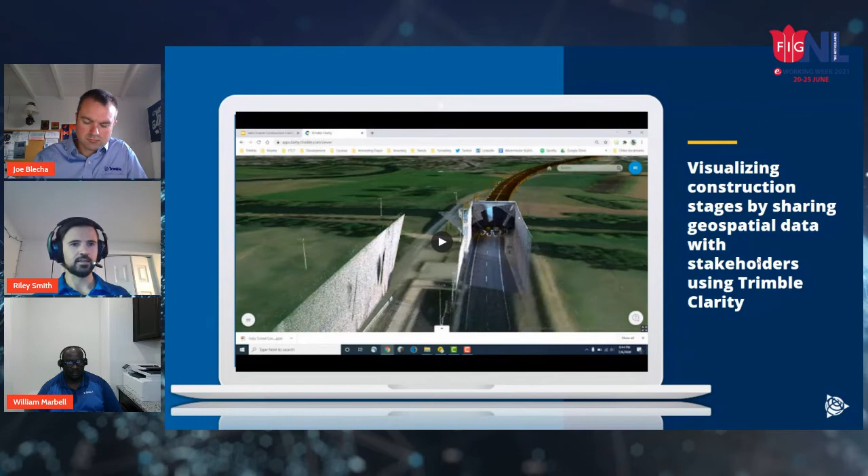Excellent. And maybe I should have taken a little more time. I think we still have about 20 minutes. But I think with that, Joe and I wanted to talk about questions and next steps for all of you, and some resources as well if you want to find out more information. So my part here about... Oops. There, back. Sorry guys, I'm not sure what's going on. So, all right, back here.